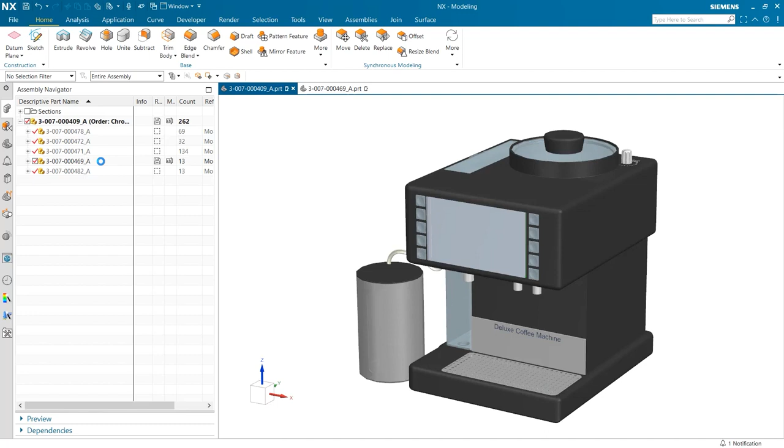I have already isolated the subassembly in a new window, and the first thing I'm going to do is start up the Checkmate tool found under HD3D Tools. This is where we will be able to find all of our test results when we run our quality assurance checks. Now that we have opened our Checkmate tab under HD3D Tools, the next thing we are going to do is begin to set up our tests.

To do this, we can open the Developer tab from the top of the screen and select the Setup Tests icon. When this is done, the first thing we will be prompted with is to determine the scope of our analysis. We can either choose to look at the current part, all loaded parts, or all of the parts found within a single folder. For this scenario, the current part option is all we need.

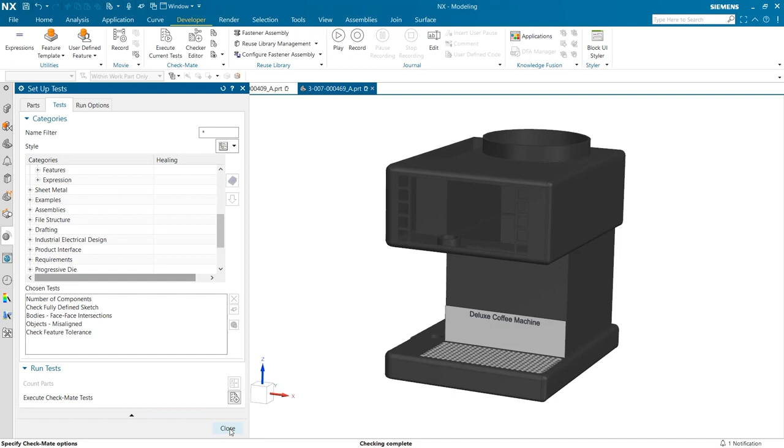With our scope now selected, we can now choose which tests will be run. I'm going to select a variety of tests to help demonstrate a few areas where these quality assurance tests can assist your productivity. As you may notice, there is a large number of options to choose from, ranging from information checks, modeling, assemblies, PMI, and requirements. This ensures that the majority of frequent use cases are already covered in the out-of-the-box Checkmate tests. With 5 tests selected now, we are ready to execute our tests and analyze the results.

When I run our tests, the first thing that stands out is that there are 3 different icons next to our tests. The blue i signifies the test resulted in an information message. The green arrow means the test was skipped, and the green checks mean that the test had a successful result.

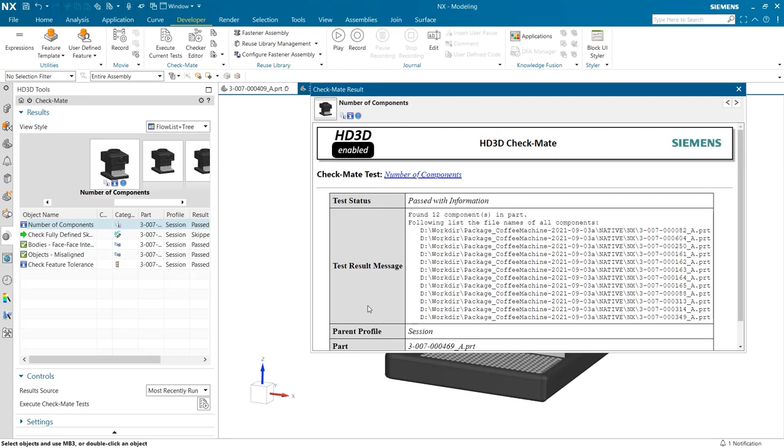The first test which was run was a simple information check to analyze how many components are in our subassembly. To see this result, we can right-click on the test case and select Show Info View. Doing this will bring in a new window with more information on the test results. When I do this, we can see that there were 12 different parts within this subassembly.

Looking at the next test, we can see that there is a green arrow next to it, signifying the test was skipped. However, this is because in our assembly we have no sketches to check. After this, the next 2 tests have green checks, signaling the checks performed successfully without error. To confirm they tested for what was intended, I'm going to right-click and once again select Show Info View.

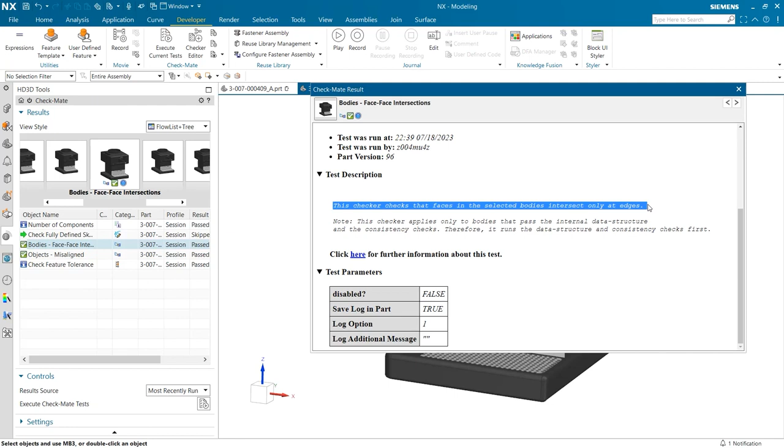Once this is opened, if we hit More Detail at the bottom, we can take a look at the test descriptions and parameters. Here we can find a more detailed explanation of what is tested for, as well as the values that were tested. The last test here is a check feature tolerance test. When I open the Show Info View window, we can see that our tolerances all passed for acceptable values. To find our tolerance value limit, we can look under the parameters by once again selecting More Detail.

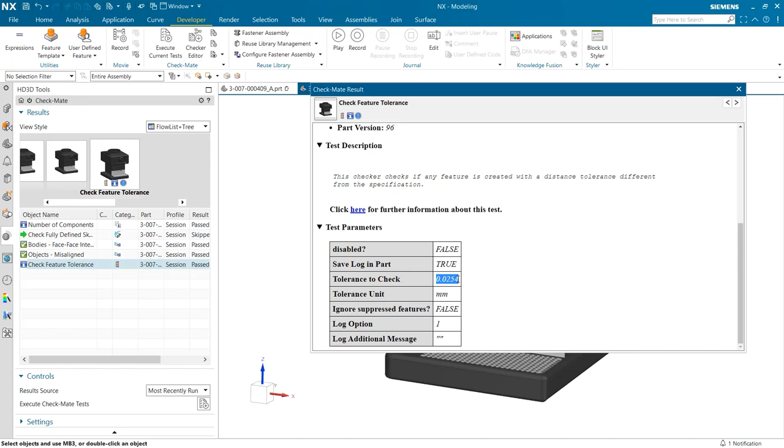To review what we have looked at, we began by exploring how to set up a few Checkmate tests using the out-of-the-box pre-made options. After that, we executed our tests and began reviewing our results by utilizing the Show Info View option when we right-clicked on each individual test. And lastly, we further explored our test results by selecting the More Detail button found at the bottom of the Show Info View window.